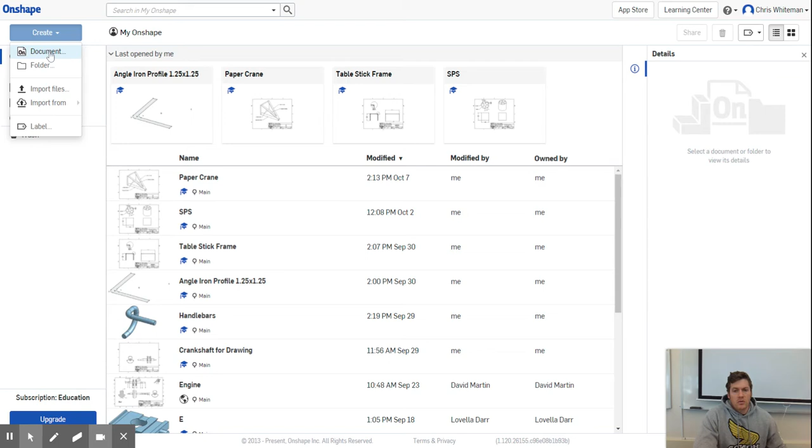To start with, we're going to create our truss, and we're only going to create a sketch of it. We're going to call this our cardboard truss. Now this is truss with two S's, not trust, so I want to make sure you understand the difference.

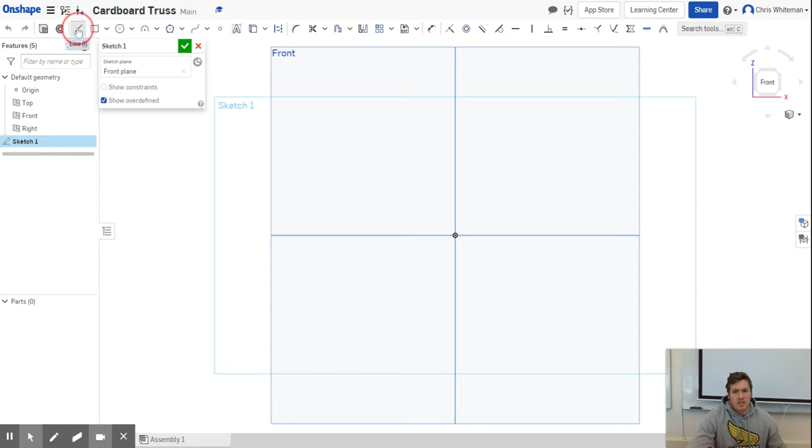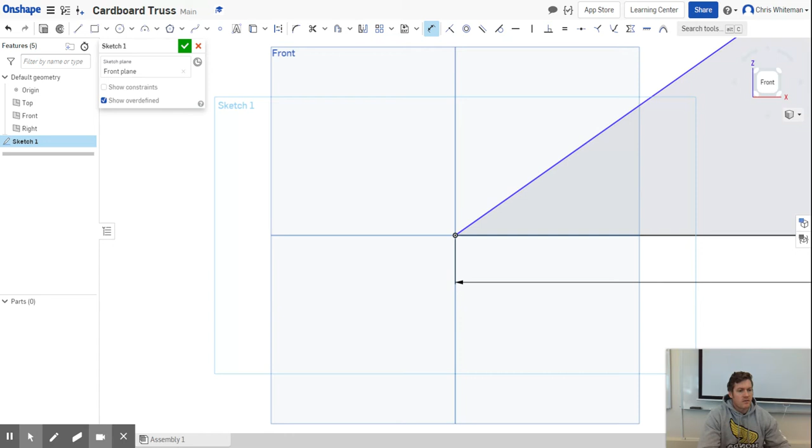After I've created my new document, I want to go into my front plane and do my sketch there. The first thing I want to do is draw a very basic triangle that looks like a rudimentary truss. Remember the outline stated that the truss has to be between 12 and 36 inches in length. 36 inches is not easy to work with, so I'm going to make this thing 24 inches long, which makes for a pretty good sized truss.

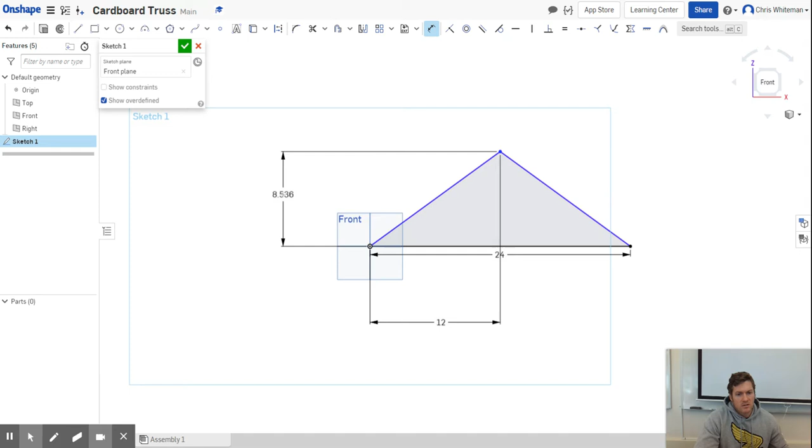The next thing I want to do is make sure this is actually centered in my 24-inch span, so I'm going to dimension that to 12 inches. Then I want to set my height. The directions said it has to be between 6 and 12 inches tall, so I want to be somewhat ambitious and make this thing 10 inches tall.

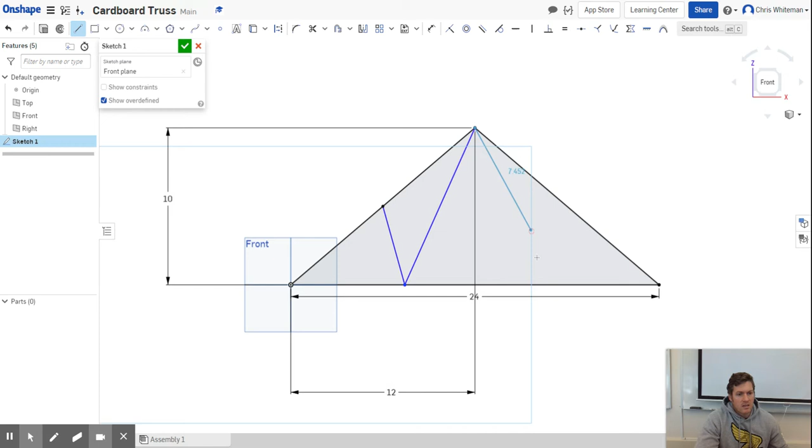The type of truss you pick is totally up to you. I'm going to go with something like a modified fan or a Fink truss, so I'll do a real simple truss. It's going to look something like this. I'm going to finish it, then come back and add in this side as well, and then dimension it.

I want this to be split evenly, so I want this to actually be 8 inches. Since it's 24 inches divided by 3, you get 8, so I want this side to be 8 inches as well.

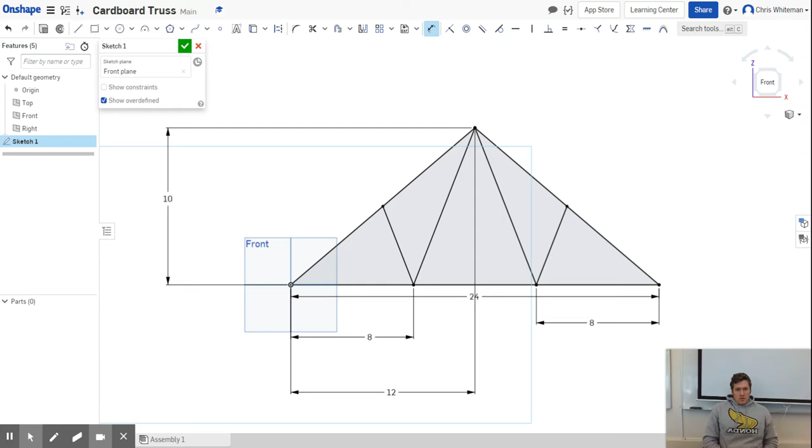Now I have a very basic truss that I can work with. The problem is that when we look at our truss now, it's just simply a sketch. It has no thickness to it. It's just a drawing in the middle of space. We want to give this thing thickness.

To do this, we need to use our beam profile. Some of you guys remember this from the last tutorial, and hopefully everybody does, but I'm pretty sure not everybody does, so I'm going to show you how to do the beam profile here in a second. But before we do that, we want to create the actual profile itself.

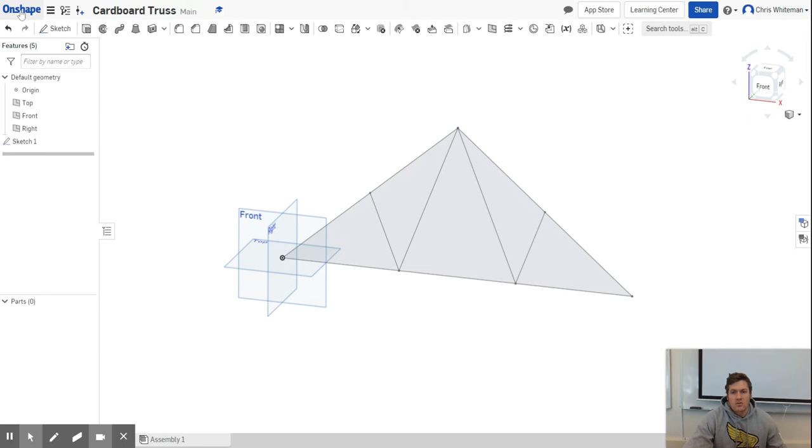I want to go back to the Onshape dashboard and create my truss profile. To do this, I want my truss profile to start on the top plane, so I'm going to do my sketch on the top plane. I want this to replicate what the truss will actually look like.

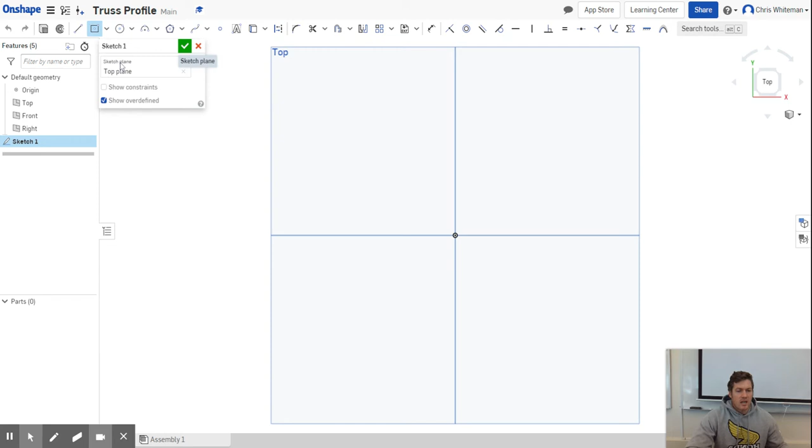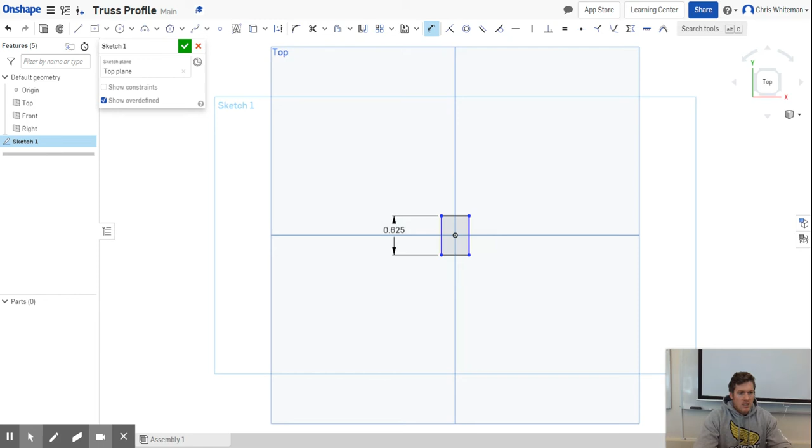Since we know we're making the truss out of 3 pieces of cardboard stacked on top of each other, I want to reflect that in my drawing. I'm going to make each piece of cardboard the equivalent of 5/8 of an inch tall. So I'll go in here and make my first dimension 5/8.

Then I want this thing to reflect that it's 3 pieces of cardboard wide. I don't want to do my 90-degree measurement, I only want to go up here, and I want to make this thing 3/8 of an inch wide.

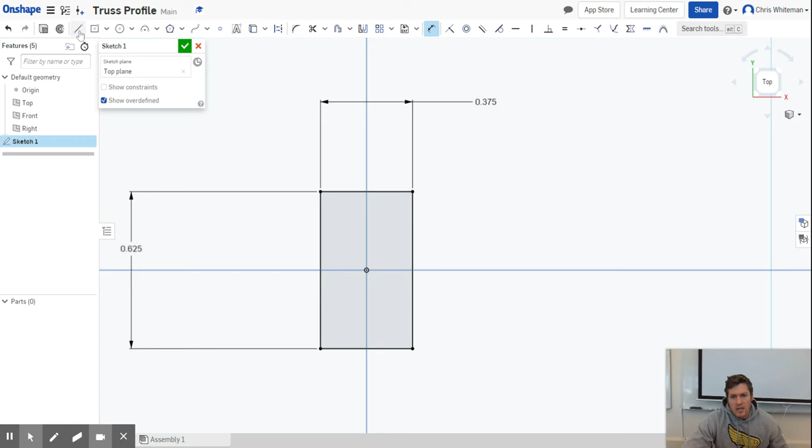Now I want to show that we actually have individual pieces of cardboard inside here. To do that, I'm going to put some interior lines in here at about 1/8 of an inch wide. I'm going to put a second one in that's also at about 1/8 of an inch wide, placed like that.

Now I want to dimension them, I want to give them a thickness. I'm going to make this one 0.125, and I'm going to make this one 0.125 as well. Now that I have my individual 3 pieces of cardboard, I want to be able to show that they're actually 3 individual pieces.

To do that, I'm going to create some fillets, starting with fillets on the outside first. I'm going to make this fillet equal to 0.05.

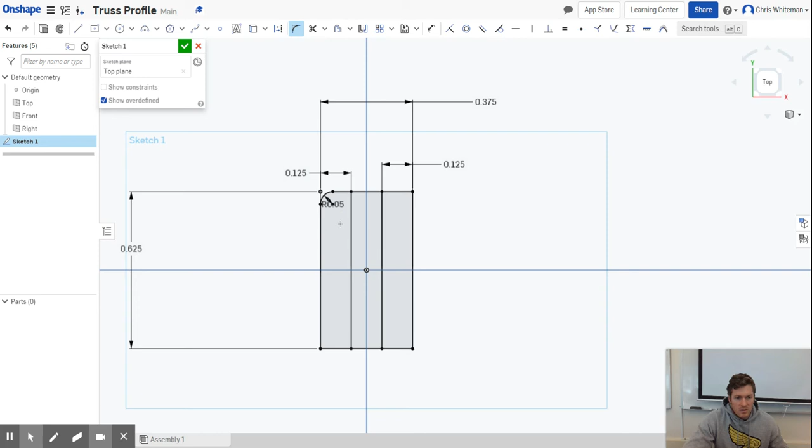And that looks pretty good. I'm also going to make this corner, and this corner, and this corner all equal to 0.05.

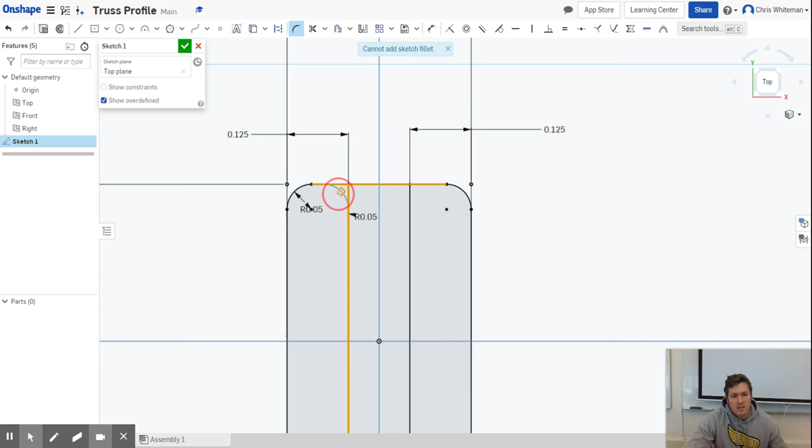But the difference is I can't see inside here, so I want to be able to show that I actually have 3 pieces here. So I'm actually going to fillet my inside corners as well. I'm going to fillet this to that and make that there.

And then on the top here, we can see it actually cut off our lines, so I'm going to put that line back in, and then come back in and sketch my fillet here. Now I'm going to come in on the bottom, and I'm going to do the same thing on the bottom, sketch my fillet in the bottom here.

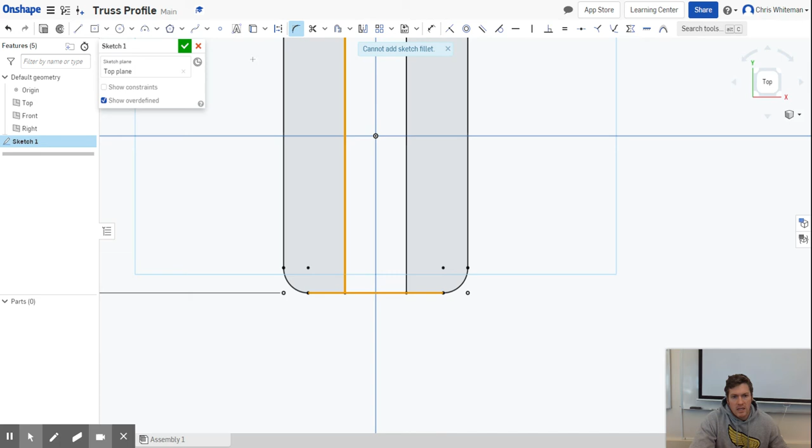So I'm going to go from here to here, and that's the first one. Then I'm going to come in and sketch my fillet from here to here, or the line, and then I'm going to come in and sketch my fillet here as well.

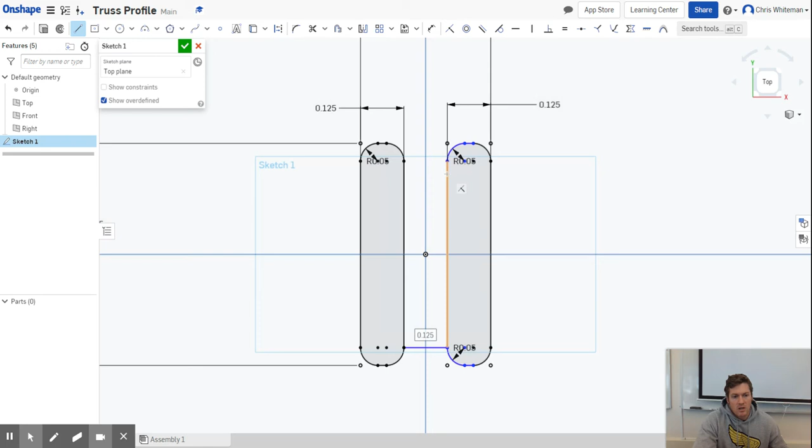Now I want to be able to still connect my pieces, so I'm going to connect them by just drawing some lines in like that, and draw another one in like that. Now I want to get rid of my interior lines because I don't need them, so I'm going to delete that one, and delete that one.

Now we have a fully defined sketch that we can use. So I'm going to finish that, and now my sketch is done. This will be the profile that we're going to use for creating the truss.

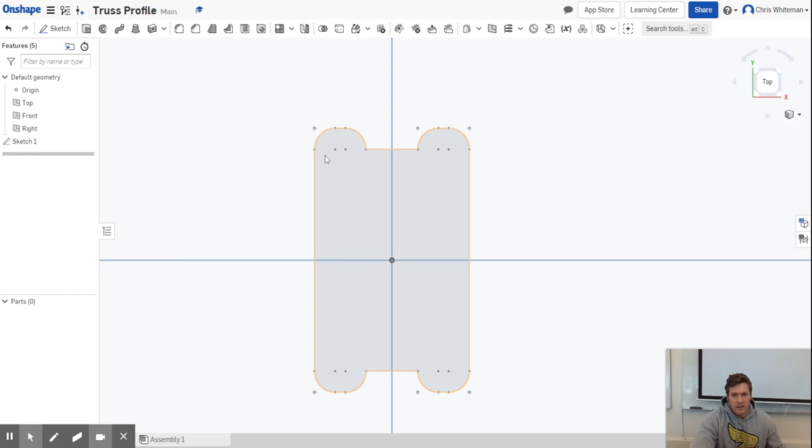So I'm going to go back to the Onshape dashboard, and we can go back to our original truss. I'm going to go back in here, and the first thing I want to do is add in the beam feature. So type in beam feature.

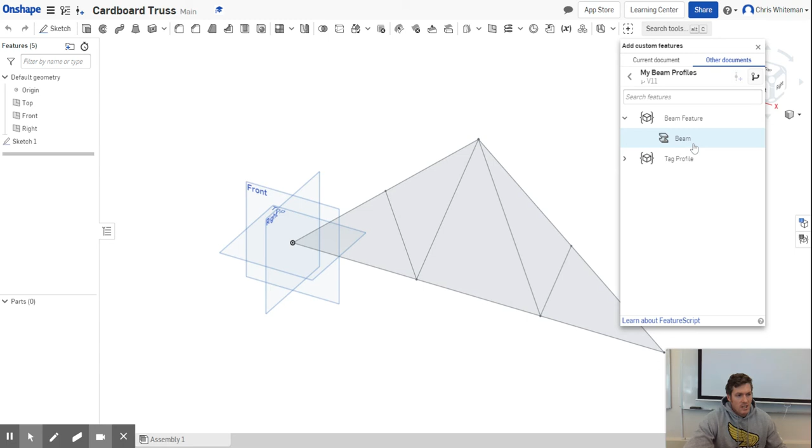I want to go down to version 11, the V11 beam feature. I'm going to click that, double click beam, and it was added to the toolbar. Sometimes it doesn't pop up right away, but usually it does. I'm going to go to beam, and this pops up.

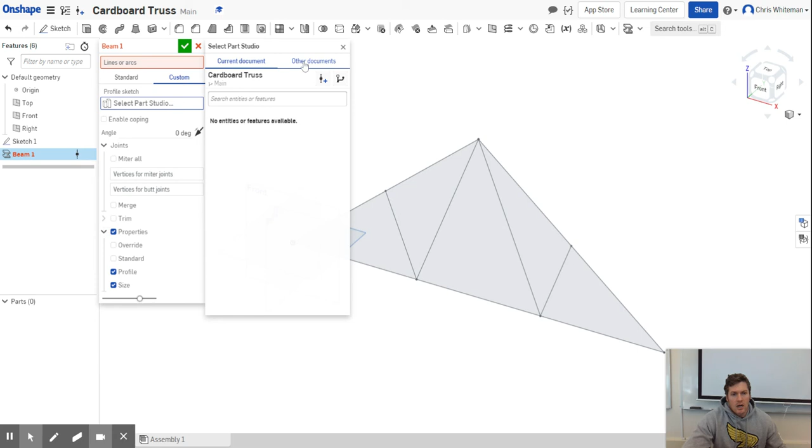Now it defaults to the ANSI inch and the L equal angle. We want to use the weldment profile that we just created, so I'm going to go to custom, select Part Studio, other documents, my Onshape, and we can see here, here's the truss profile that I just made.

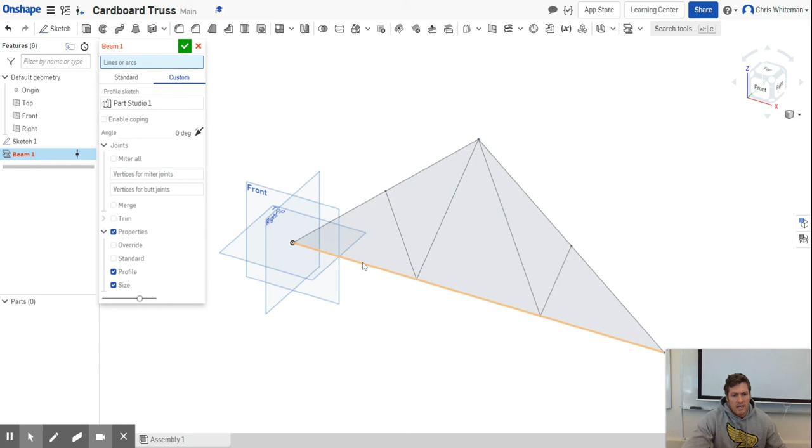Now I have to create a version of it in Truss Profile, so I'm going to create a version. You can give it a custom name if you want, I'll just call it V1. I'm going to hit Create, and there we go, Sketch 1. I'm going to select my line that I want to use, and lo and behold, it pops up.

But the problem is the way it pops up is not the orientation that I want, so I want to change this orientation to 90, and that makes it upright.

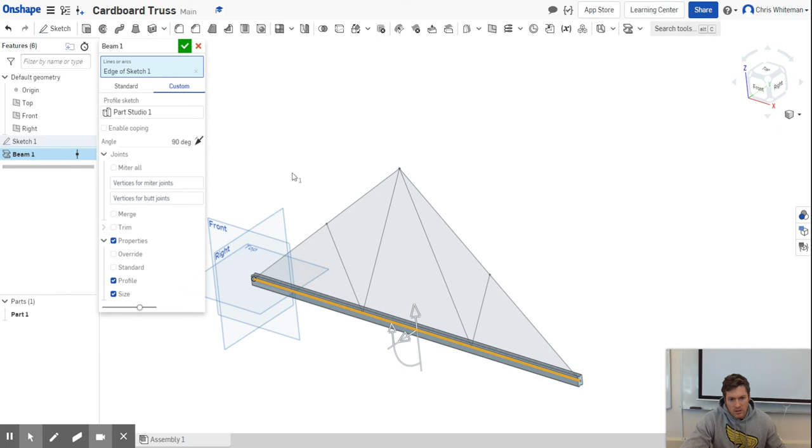Now I can come through here and start adding in the rest of my features. So I can add in the rest of my members here, here, here, here, here, and here.

And I know that the corners aren't perfect, but if we go to miter all the corners, it makes things look even worse. Because even though it makes the corners here look great, it makes our top corners look terrible. So I'm just going to leave the mitering feature off for now, and everything will still work fine, so you don't have to worry about it.

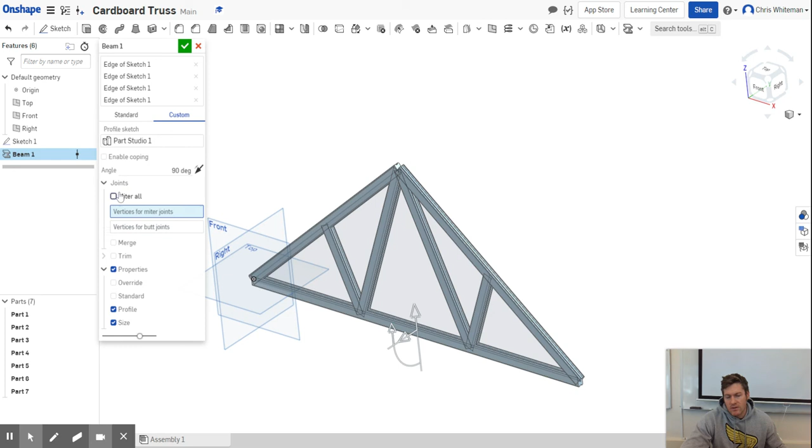After this is done, I'm going to click the green check mark, and there we go, we have our truss. And we can see here that if we just zoom in on this, it actually looks like we have 7 individual features that come together to make our truss.

The next thing we want to do is create our drawing. So we're going to get rid of this thing. I'm going to go down here to the bottom corner, and I want to go to Create Drawing. Hopefully this comes through, because historically this has always been kind of slow.

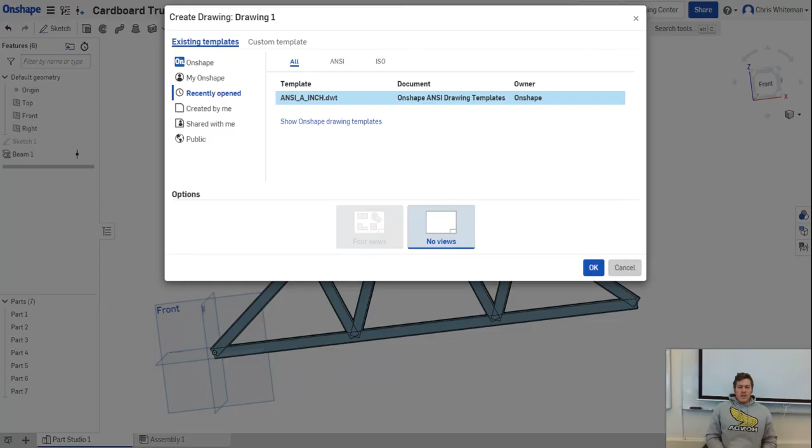The difference is with this drawing, we're still going to use the same template we've always used, the A ANSI inch. But the difference on this one is that I want you guys to add a detailed view of the corners of your truss. And like I said, this may or may not work because sometimes it's really slow.

Go back to my Part Studio. Sometimes I have to go back and forth between the Part Studio and the drawing a couple of times to get it to load.

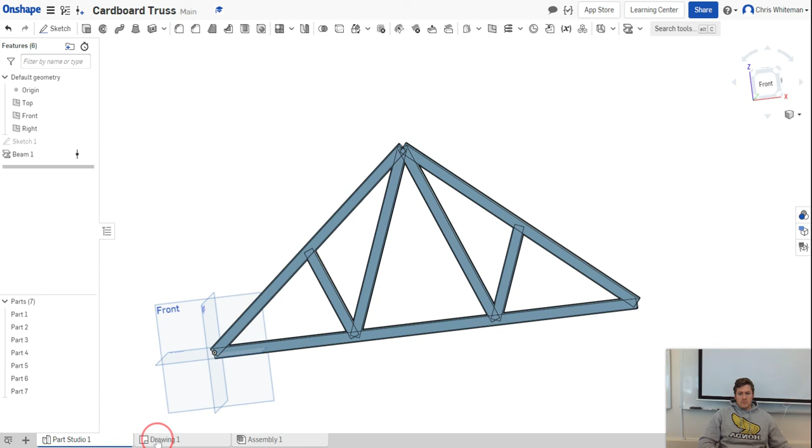You guys aren't the only ones that experience issues with this, just so you guys know.

Let's try refreshing. Onshape seems to like refreshing sometimes, but not all the time.

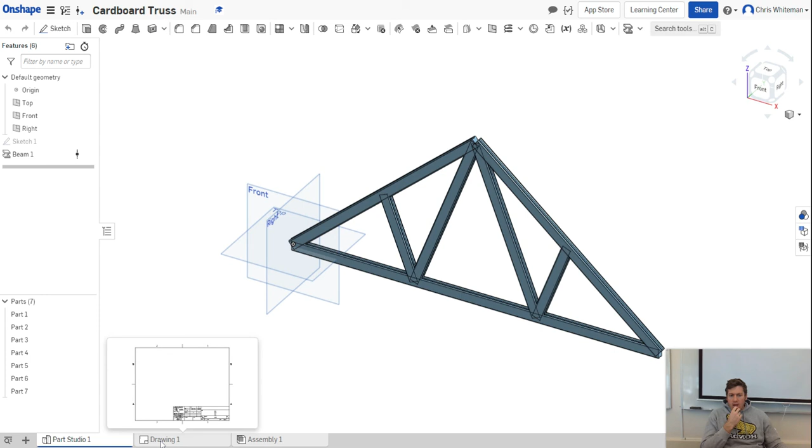Well, I'm going to have to come back to the drawing part later when it feels like loading, but at least you get to see how to make the truss from this for this first part of this.